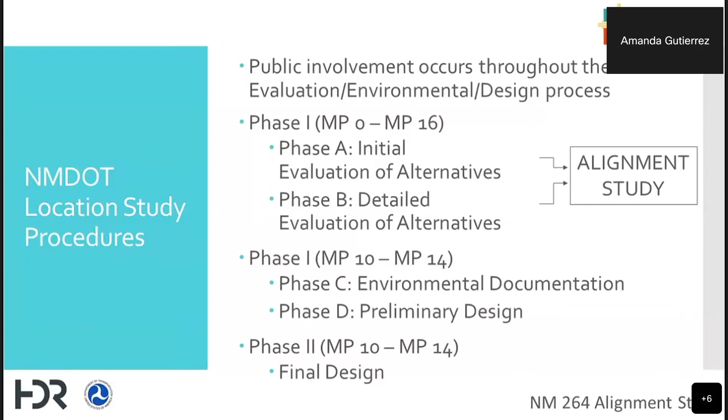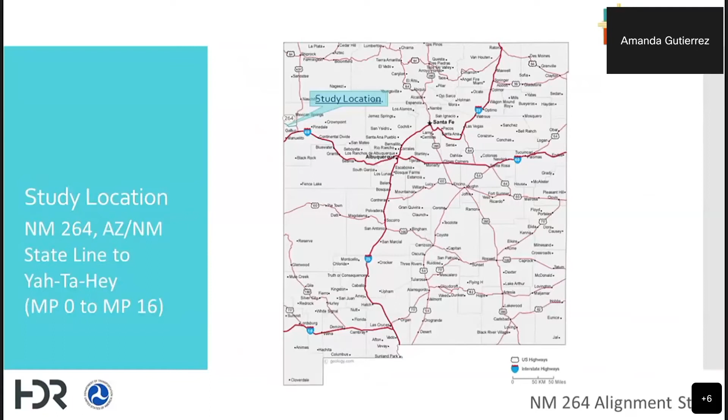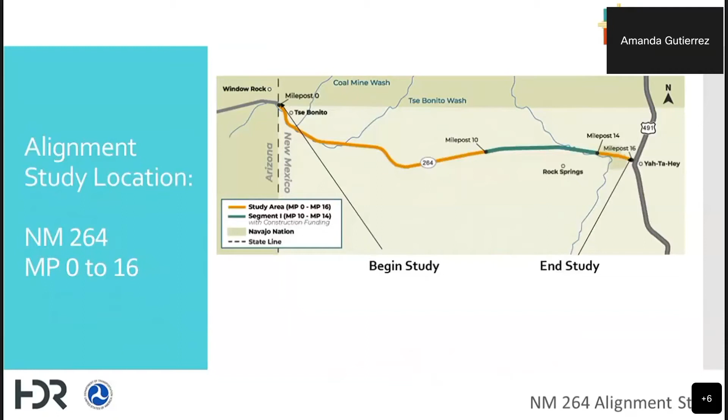As part of the alignment study, we'll be documenting the existing conditions, identifying any traffic or safety concerns in the area, investigating sensitive cultural and biological resources, and seeking public and agency feedback, which is what we're hoping to receive from this meeting. Then we will compile this information and identify and evaluate improvement alternatives to narrow them down and arrive at a proposed improvement alternative.

The preliminary purpose and need, or the intent of this study, is to address the existing roadway conditions, improve drainage conditions, improve multimodal access to the corridor, meaning pedestrian and bus access, and to improve overall safety for the corridor.

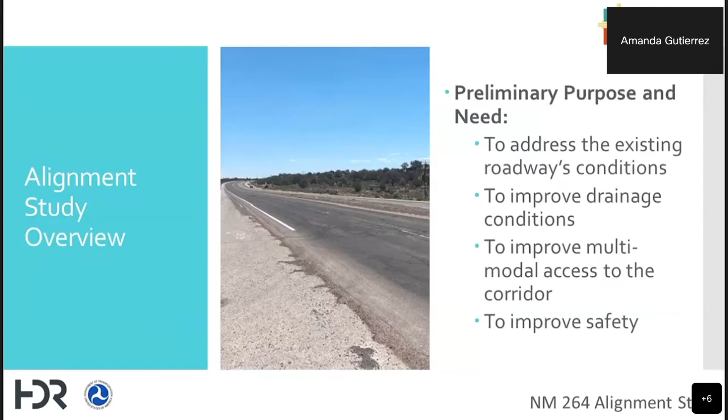So for the existing conditions we have noted for this project, there's pretty poor pavement, and this extends from Milepost 0 to Milepost 16. You can see there's pretty heavy wear. The current roadside barriers don't meet current standards, so those are something we would look to bring up to the current standard.

We have significant roadway embankment erosion. We will have a few pictures showing this here in a moment. We'd want to look to eliminate the erosion and try to reduce it in the future.

We do have right-of-way limitations in the corridor. The project travels largely through the Navajo Nation, and so most or all of the improvements will remain within the existing right-of-way. There is a lack of median drainage system. There are some areas that have median drainage where the roadway is super elevated, but these are only isolated locations, and so we have significant debris and sediment in the medians.

The pedestrian access routes, primarily in the urban areas, more in the Tse Bonito area and Yah-Ta-Hey, don't meet current standards, so we'll look to evaluate the best alternatives to bring those up to current standards. And then there are significant sediment deposits throughout the corridor.

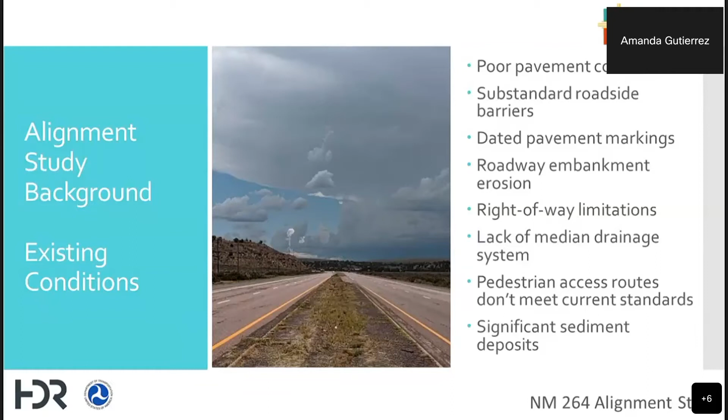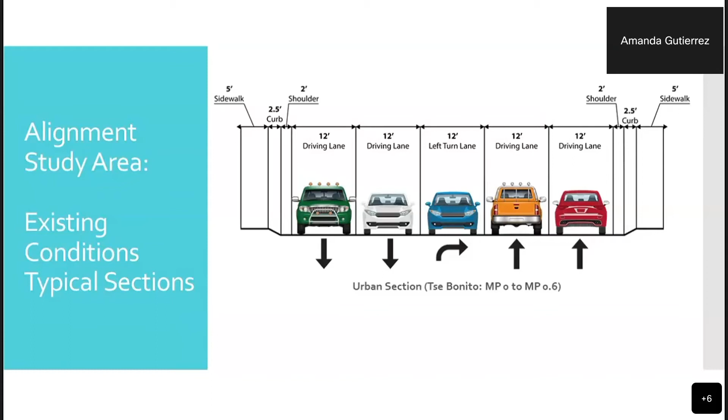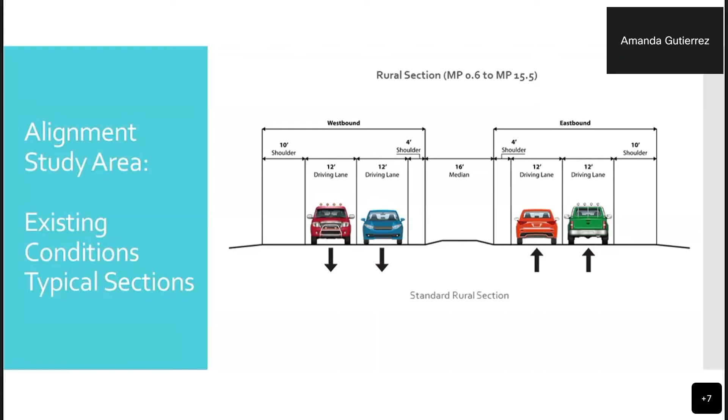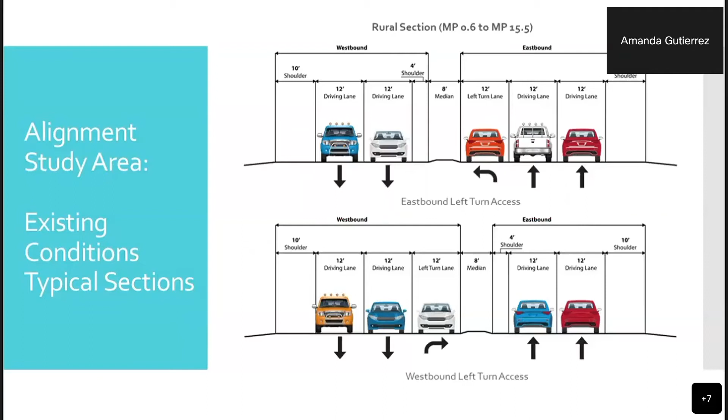And then the last section we have here is from Milepost 15.5 to Milepost 16, where the 8-foot raised median changes to a 16-foot two-way left turn lane, and then the two 12-foot driving lanes remain, as well as the 10-foot outside shoulders.

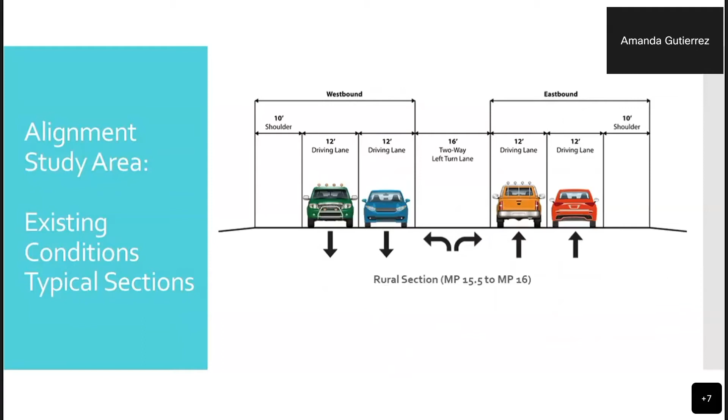So as I mentioned before, we have significant erosion throughout the corridor. These photos are showing a few drainage crossings with significant sediment and erosion at the outlet structures. We also give the milepost for each one of these, just so you can see throughout the corridor the issues for the drainage crossings.

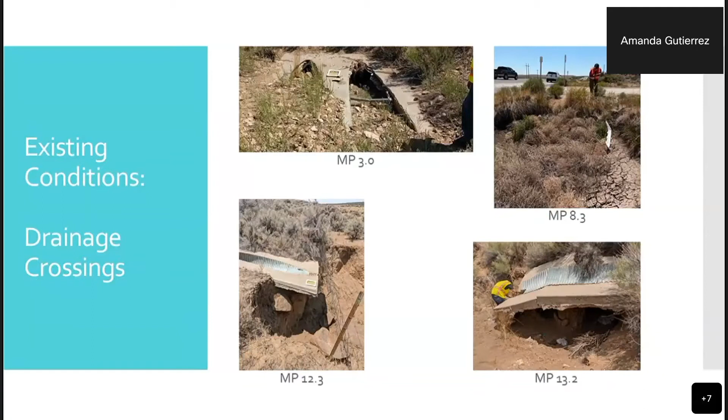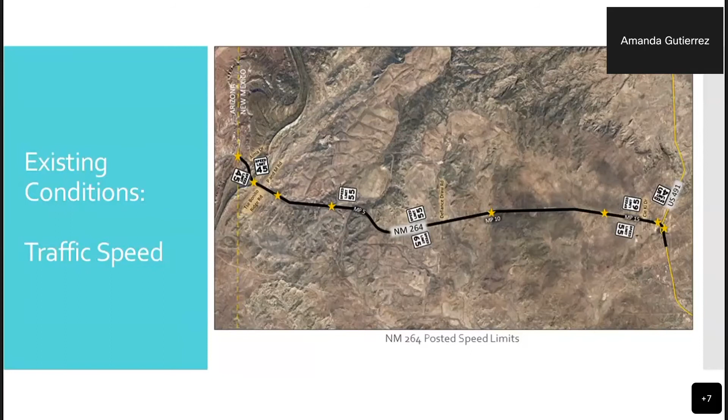This map shows the traffic speed through the corridor. As we start on the west side of the project at the Arizona-New Mexico state line, the speed is 45, and then increases to 55 just to the east of Tse Bonito. At approximately milepost 6.5, the speed increases to 65 miles per hour, and remains that speed until the approach to Yah-Ta-Hey, where it reduces back to 55.

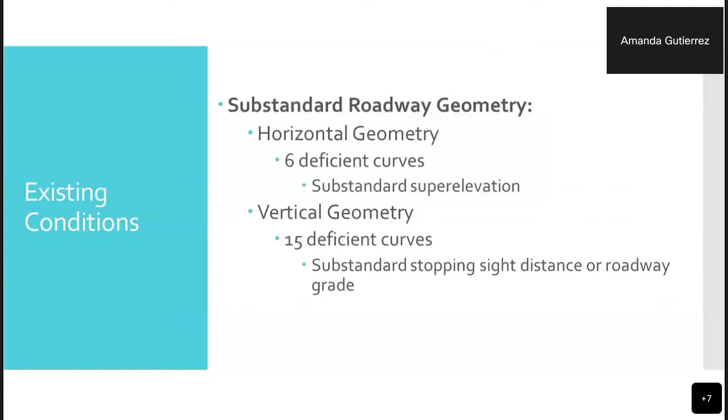So part of the evaluation of the speed, we look at the roadway geometry, both horizontal and vertically. For the posted speed of 65, there are 6 deficient horizontal curves, and these are primarily due to substandard superelevation, that being the cross slope of the road on a curve. For the vertical geometry, there are 15 deficient curves, primarily due to substandard K value or stopping sight distance, or it doesn't meet the minimum or maximum roadway grade.

So what we have here is a crash map showing where most of the crashes occurred. What we do here is look at the geometry in these areas and other elements that would affect the reasons for increase in crashes or the concentration of crashes, and then include that in our analysis for what the proposed alternatives might be.

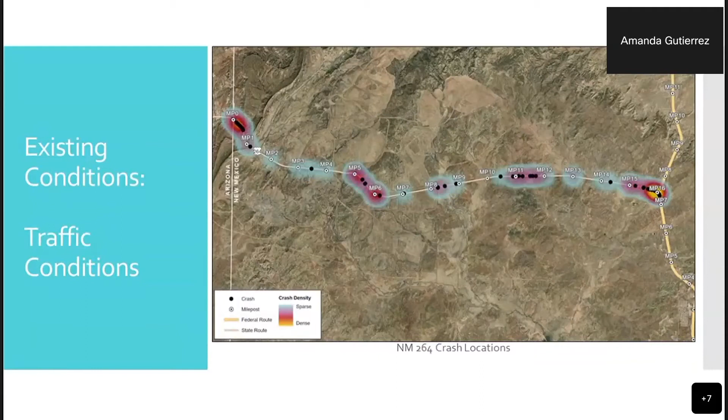So for the overview of the alignment study, the potential improvements include improved roadside barriers, that being guardrail and end terminals, improved turnouts and access to properties along the corridor, looking at spacing and sight distances for those accesses, updated pavement markings to have better visibility at night or during inclement weather, and the potential of an upgraded ITS infrastructure or broadband throughout the corridor.

We'll also look to upgrade the signage. Similar to the striping, it will make it more visible during the night and during inclement weather. Addition of drainage improvements will address the erosion and sediment issues. And then finally, we'll look at improved bicycle and pedestrian facilities, not only in the urban type areas.

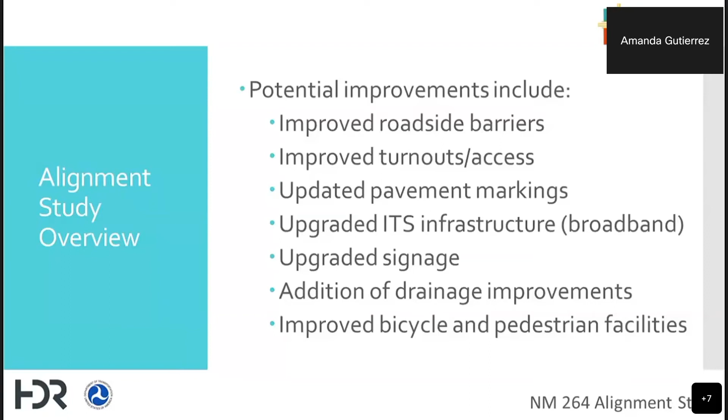So for segment 1, which is the section that will go through the final design process, is from Milepost 10 to Milepost 14. We will provide environmental documentation, including biological and cultural surveys that have already been completed, and then we will enter into preliminary design phase with the alternative that was determined from a previous scoping report completed by the NMDOT, and finally, for this segment, we'll prepare and deliver final design plans.

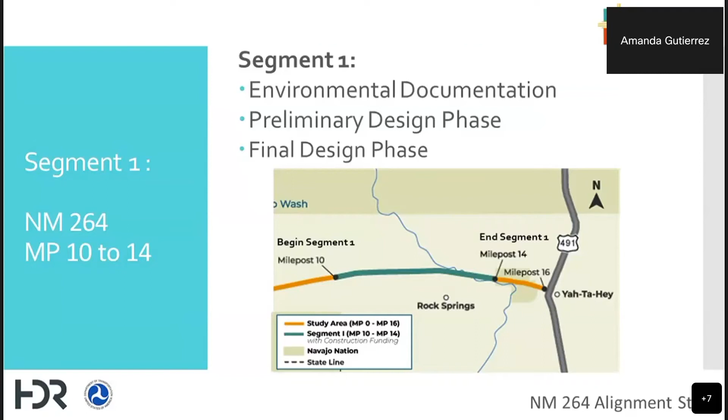For this segment 1 area, construction funding has been identified, and we anticipate construction to start in the fall of 2023. The highway improvements for this segment will include full depth reconstruction of the existing pavement, drainage improvements to address the erosion and sediment issues, updated roadside barriers and signing and pavement markings, as well as upgrading access to the corridor.

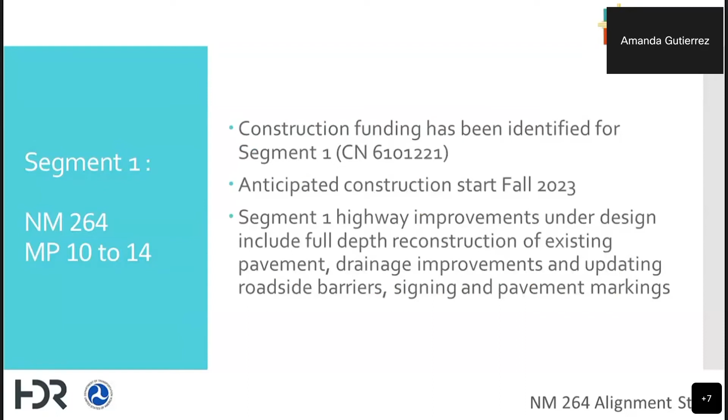So for the proposed typical section that we'll be using in segment 1, we will be maintaining the two 12-foot driving lanes in each direction, with the 12-foot left turn lane for the turnouts throughout on the north and south side of New Mexico 264. As you can see here, we have listed the turnouts and road locations.

We will be reducing the median to 4 feet instead of the existing 16-foot median. This will help us with the drainage issues that we are seeing throughout the corridor with the debris in the medians, and then we'll be maintaining the 10-foot outside shoulders.

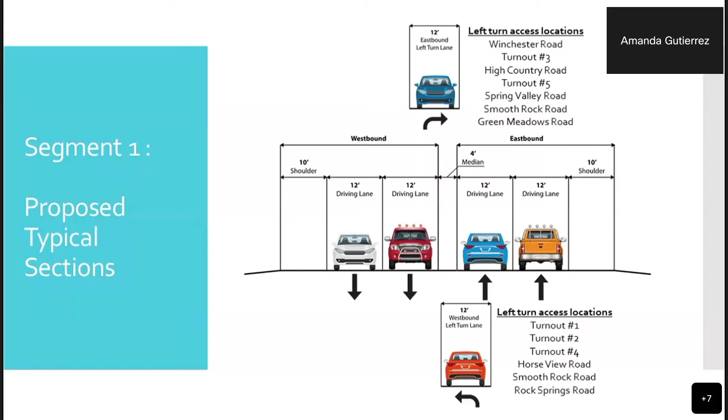For construction of this project, we wanted to touch base a little bit on the maintenance of traffic control. So the phasing that we're planning is in the preliminary stage. We're planning to shift traffic to either the eastbound or westbound lanes, depending on which side of the road we are constructing at the time. We will maintain at all times 1 lane of traffic in each direction, with access to the turnouts and roads on both sides of New Mexico 264.

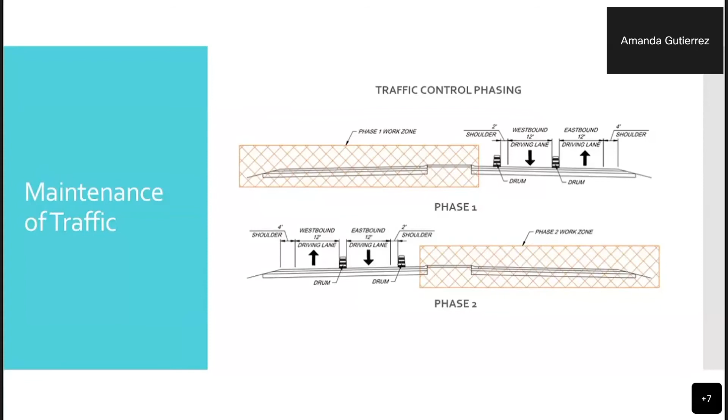Okay, for the schedule, during the spring and summer of this year, we have established the need for improvement, which was completed with the existing conditions analysis. Fall of this year, we'll do the virtual public meeting, which is what we're doing today. And then we'll take the input we receive and start identifying highway improvement alternatives. As we continue into the winter of this year, we'll further evaluate the improvement alternatives and prepare the draft alignment study document.

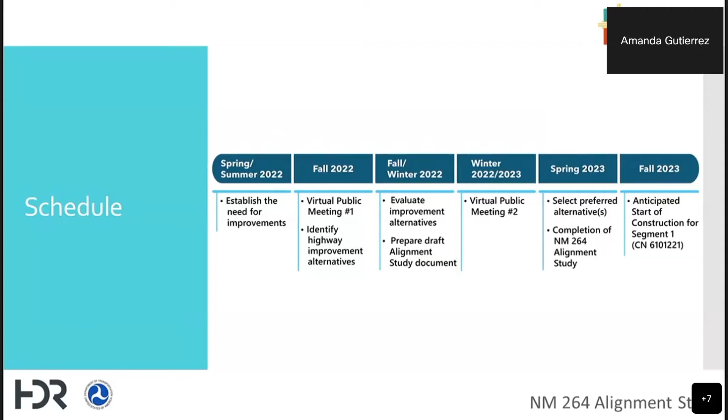We'll then have our next virtual public meeting sometime in the winter of 2022, moving into 2023. In the spring of 2023, we will select the preferred alternative and submit the final New Mexico 264 alignment study. And then, as I mentioned before, the anticipated start of construction for segment 1 is the fall of 2023.

As far as the next steps go, we will continue collecting the background data for the alignment study. We will review and document the public and agency input, and then develop the potential alternatives based on these inputs. So I will now pass it over to Christy, and she'll explain how you can provide input.

Thanks, Amanda. So we are soliciting input through September 22nd, 2022. You can provide your comments at any time at our project website. You can call 602-299-9581. You can also send us an email at nm264study@hdrinc.com, or you can send any of your comments directly through mail. Just make sure that it includes NM264 Study, c/o Christy Shepard at HDR Engineering, 20 East Thomas Road, Suite 2500, Phoenix, Arizona 85012. And again, all of your comments should be received by September 22nd.